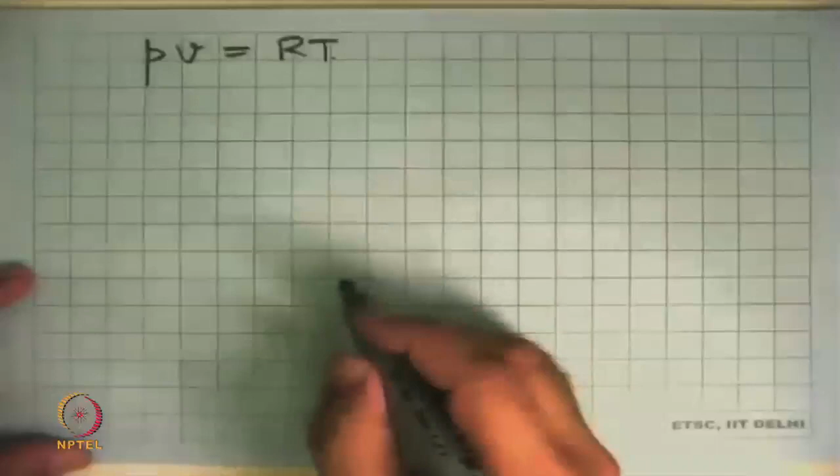We had looked at the properties of vapors, and we said that the equation of state, which we are so familiar with, PV equal to RT, doesn't apply to the vapor states, and this applies only to an ideal gas. This is the simplest form of the equation of state. We call it EOS, where P is equal to RT upon V. So basically, we have expressed pressure as a function of specific volume and temperature, or rho and temperature.

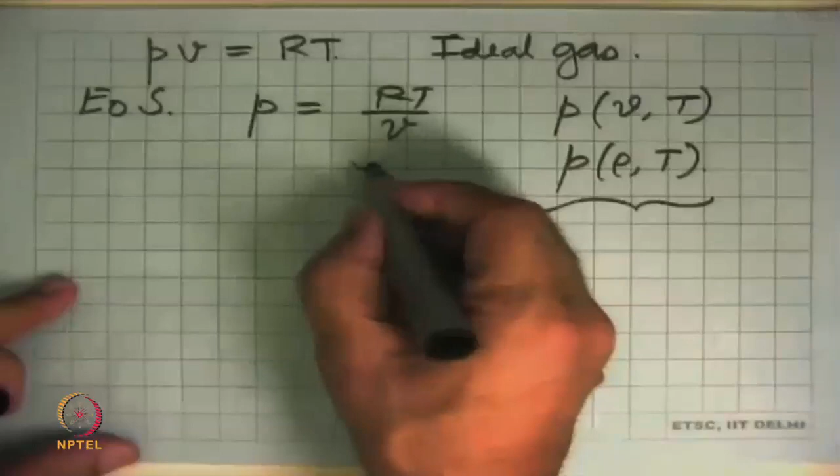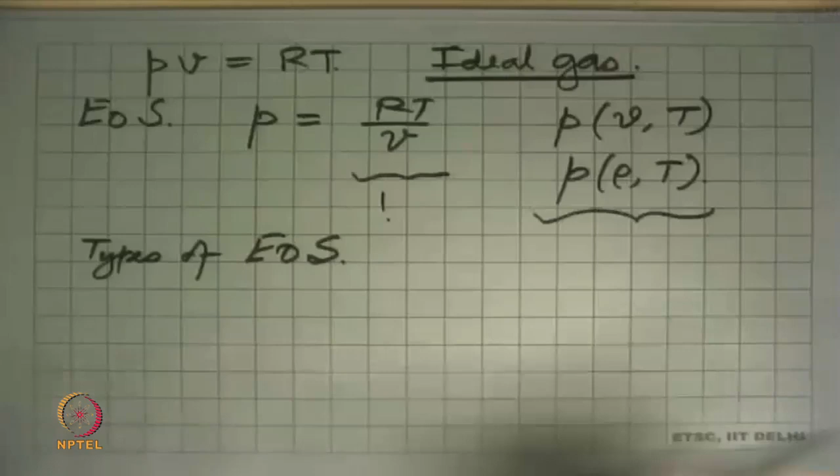So last time what we had seen is that we had defined the reduced temperature TR, T upon T critical, and we defined reduced pressure as the pressure upon the critical pressure.

The reason we did that is that it gave us a uniform set of parameters that are independent of the material, and so in some way these reduced properties are some sort of what we call normalized on a known constant. We can then talk in terms of different materials having the same reduced temperatures behaving in a similar way.

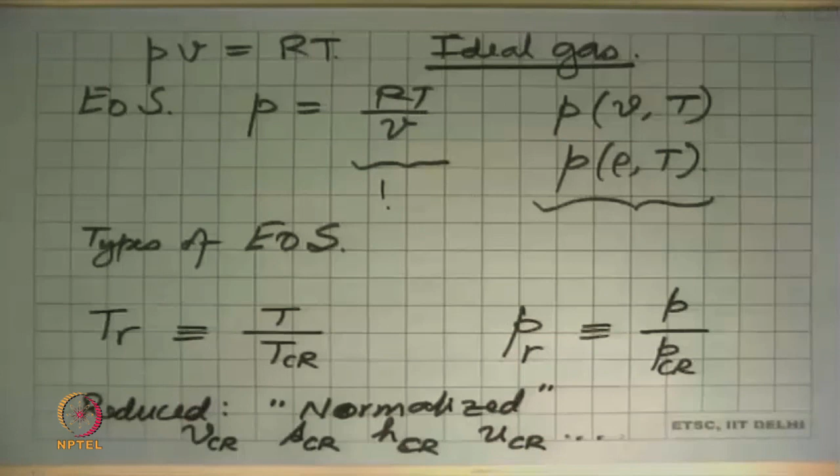So we defined these two, and it turns out that the critical states are properties of the substance, and along with that we have other critical states like the critical specific volume, the specific entropy, the specific enthalpy, specific internal energy, and so on. For a given substance, all these are unique, and you can just look up any tables and pick up all these numbers from there.

So this is what we defined, and then we went about doing an exercise of saying that if we plot on this side the reduced pressure and on the y-axis we plot the compressibility factor, then what will the graphs look like? For that we defined yesterday the compressibility factor Z.

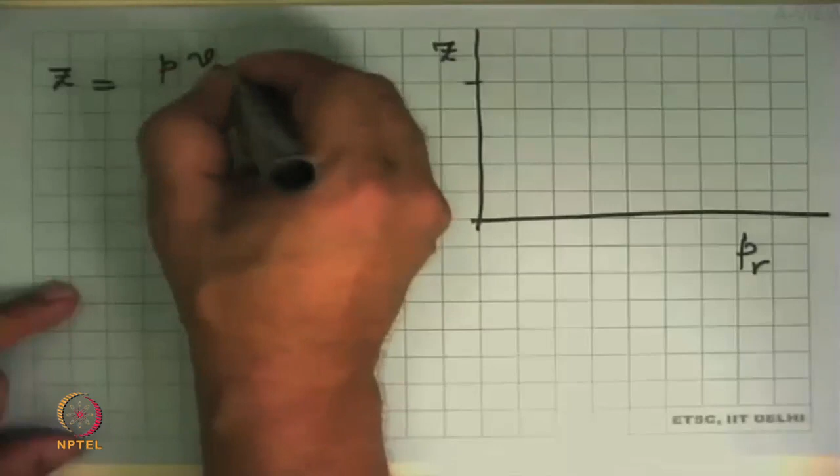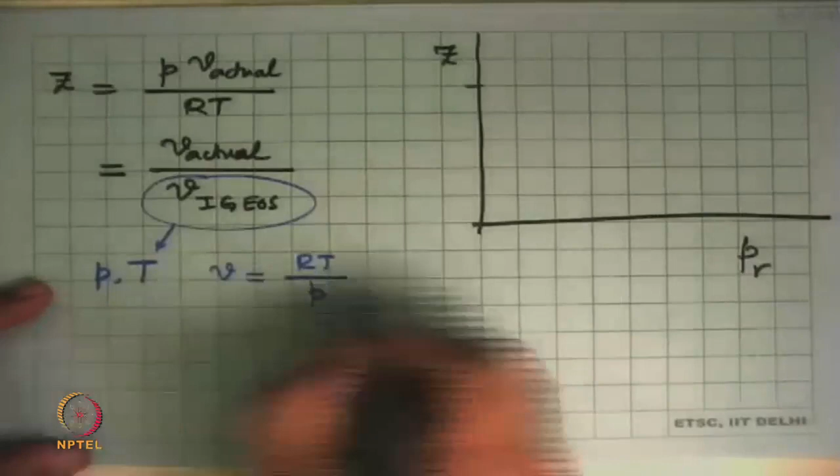Z is PV actual divided by RT, or the ratio of the actual specific volume of the material divided by the specific volume that would be calculated from the ideal gas equation of state. What we are saying is that for the ideal gas equation of state, if you have any pressure, any temperature for a material, nothing stops us from calculating V as RT upon P.

But the question is, this is from the ideal gas assumption, and how good is this assumption? That is what this ratio tells us: something we measure in the laboratory divided by what the ideal gas equation of state tells us, and we get the compressibility factor Z.

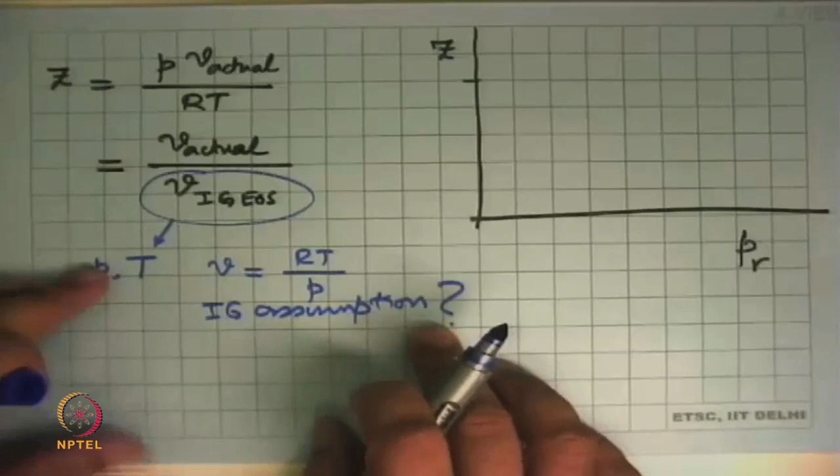And we went about drawing this curve, saying that ideally Z is equal to 1, and this is 1.0, this is 0, and this is a logarithmic scale going from 0.01 reduced pressure to 0.1, 1, 10, and even further to 100.

We argued yesterday that at very low pressures, when we start plotting, we ask: at a certain reduced temperature, what is Z? At this reduced pressure and the same reduced temperature, what do I get? At this point and the same reduced temperature, we get this. So if we go about doing plots, we'll get a series of points.

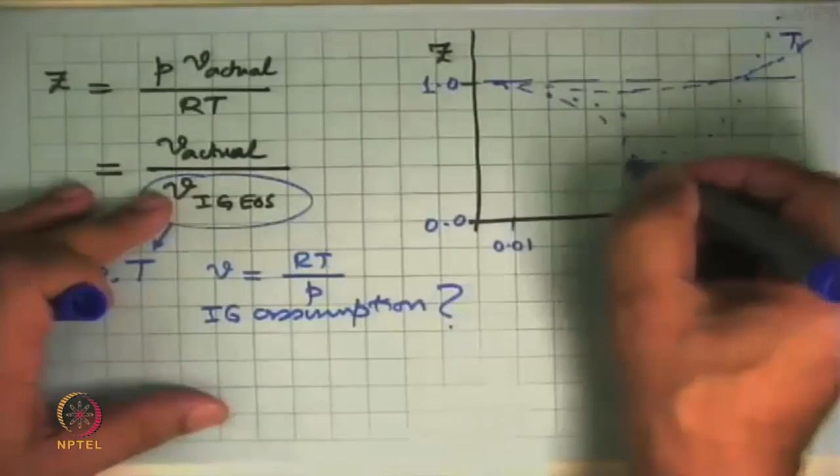They start looking something like this, at some particular value of reduced temperature. At some other value of reduced temperature, it begins to look like that. In some cases, it goes like that and then goes up. So around here, not at 1 but something like more than 10, we see that Z becomes much greater than 1, whereas on this side, Z is less than 1.

That means as pressures remain low and temperatures keep increasing, the strength of Z, which is the divergence from ideal gas behavior, increases. And Z more than 1 means that V actual is greater than V ideal gas.

This is when Z is greater than 1. If Z is less than 1, it means V actual is less than V ideal gas.

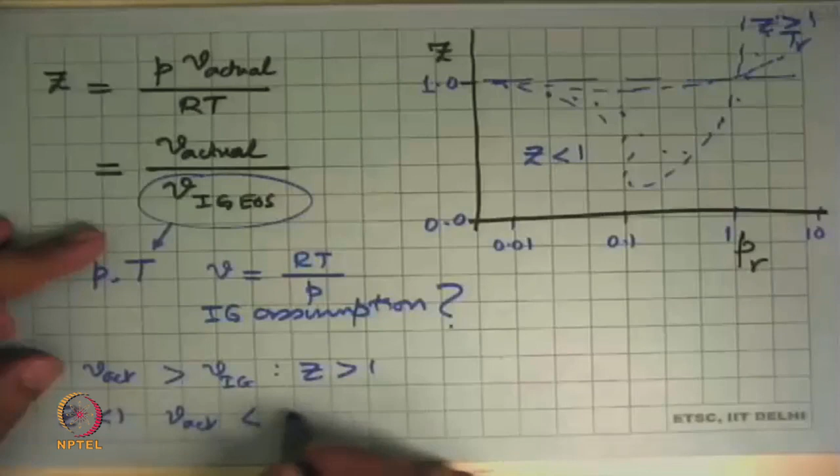That means the density would be the opposite. Here density is less than the ideal gas prediction, and here it is opposite. So in one case, the molecules are closer than what ideal gas predicts; in the other case, they are further apart than what the ideal gas equation predicts. That's what these two are telling us.

This complicates life quite a bit, because the nice equation of state that we had, PV equal to RT, now has to be modified as P equals Z times RT upon V.

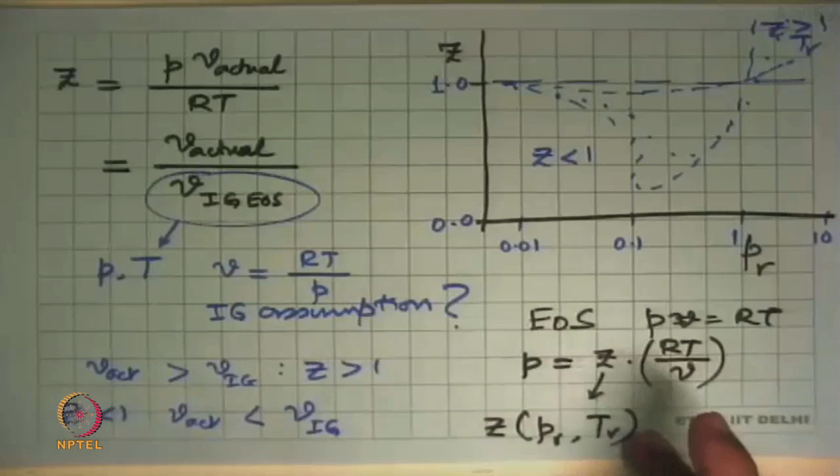And Z, as you can see here, is a function of reduced pressure and reduced temperature. Or for a substance, it is a function of pressure and temperature. If you take reduced pressure and reduced temperature, you get a common graph, which I will show you in a minute. So how do we get this?

And that equation for Z, again, one has to do curve fitting, and it comes out with a big long equation. Okay, so before that, let's look at how this curve actually looks like.

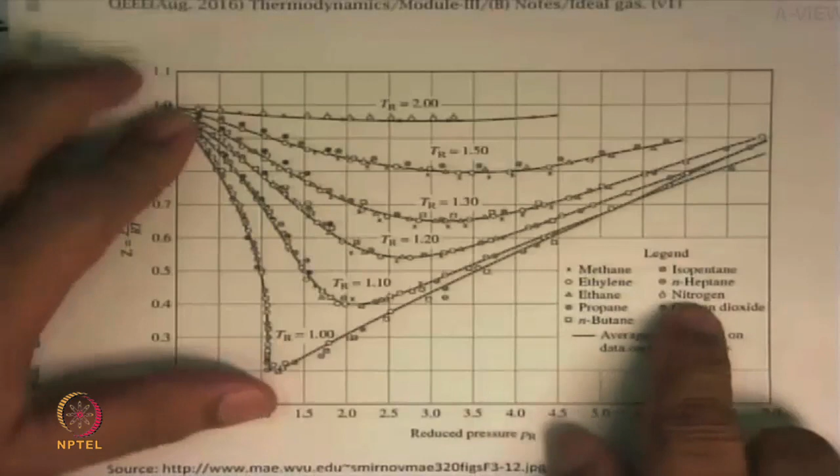So this is the real graph with real data from substances. In the legend, it shows data for methane, ethylene, ethane, propane, butane, isopentane, N-heptane, nitrogen, carbon dioxide, and water. We took the real data, measurements, calculated Z, and plotted these.

Let's take the first curve at the top here, and you can see there are some points there - circles, triangles, crosses - and they all fall within a relatively narrow band through which a curve fit has been done.

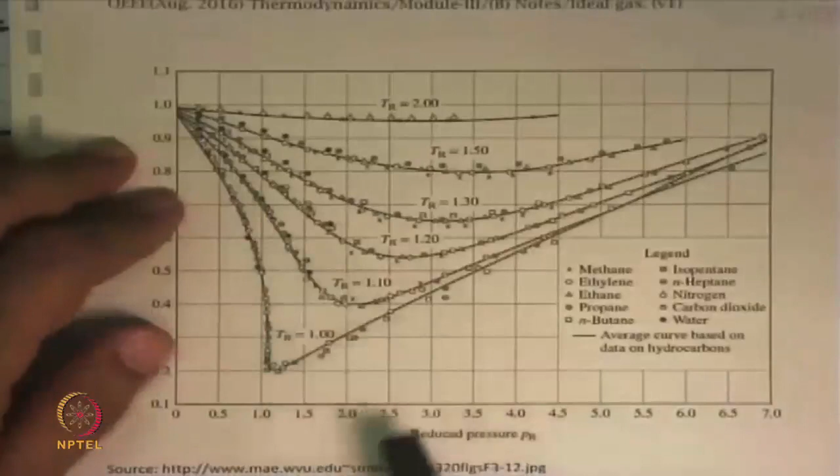The same thing was done with reduced temperature of 1.3, and we get this sort of a fit. And at reduced temperature of 1, that means temperature equals critical temperature, we get all these points here, and then they go off. They all fall on one line.

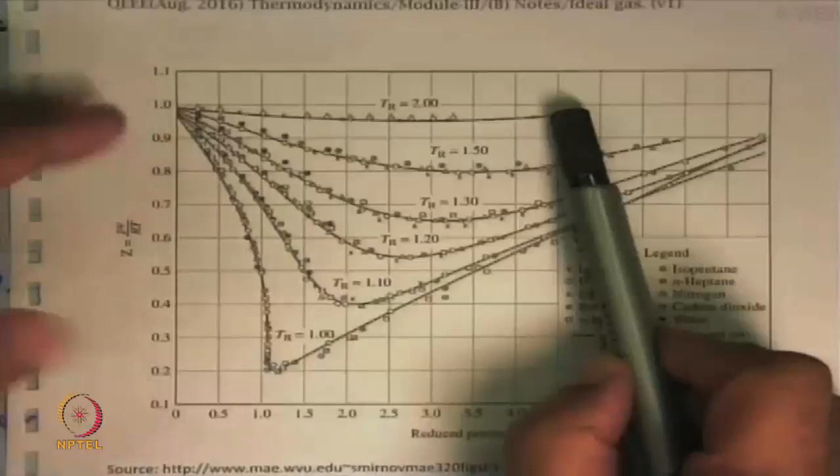This axis for reduced pressure is a linear axis, and Z is also a linear axis. The maximum here is reduced temperature of 2, meaning twice the critical temperature. So this is the reason why the generalized compressibility chart, as it's known, is so nice.

Irrespective of what materials we were looking at, and there are so many here, all their properties can be described by one family of equations, based on reduced pressure and reduced temperature. So that's what we have here.

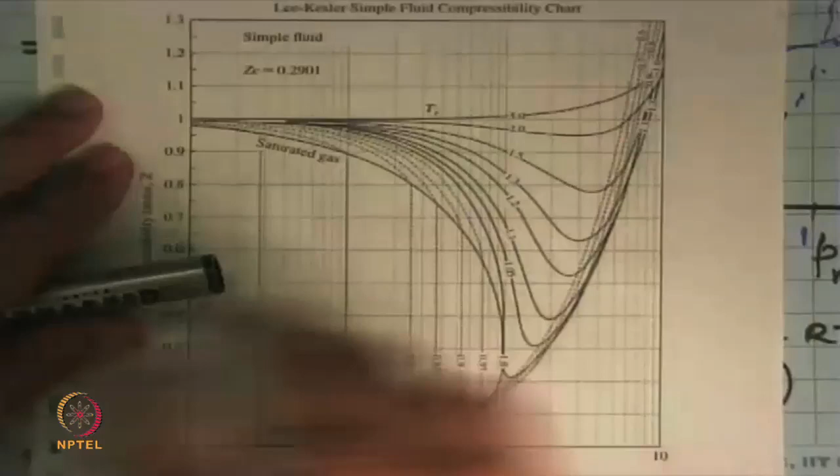The same picture on another scale. This is the same data, but now a curve fit was done to that data, and the model is called the Lee-Kesler simple fluid compressibility chart. So there's a Lee-Kesler equation of state, which was based on the data fit.

Once we have an equation, we can put as many points as we want and generate nice continuous curves, as you see on this picture. The x-axis is reduced pressure on a logarithmic scale: 0.01, 0.1, 1, 10. On the y-axis is the compressibility factor from 0 to 1, actually going up to 1.3.

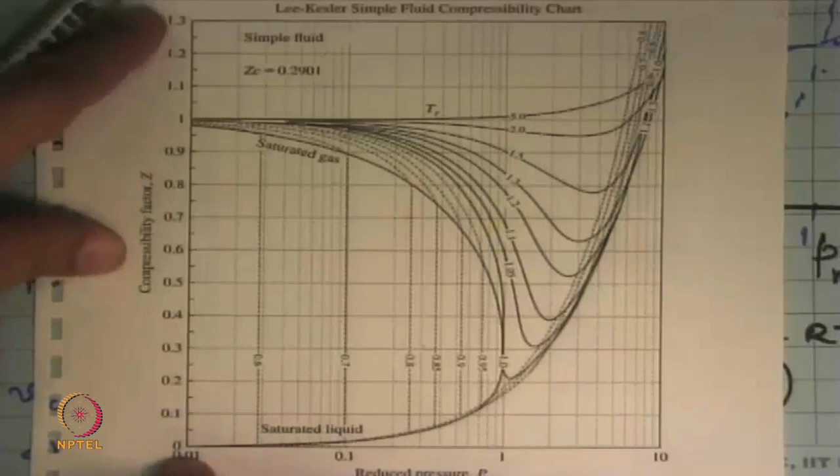And for all substances, the critical value of the compressibility factor turns out to be 0.29. Here are the curves. The topmost curve, very close to here, is the line Z equal to 1.

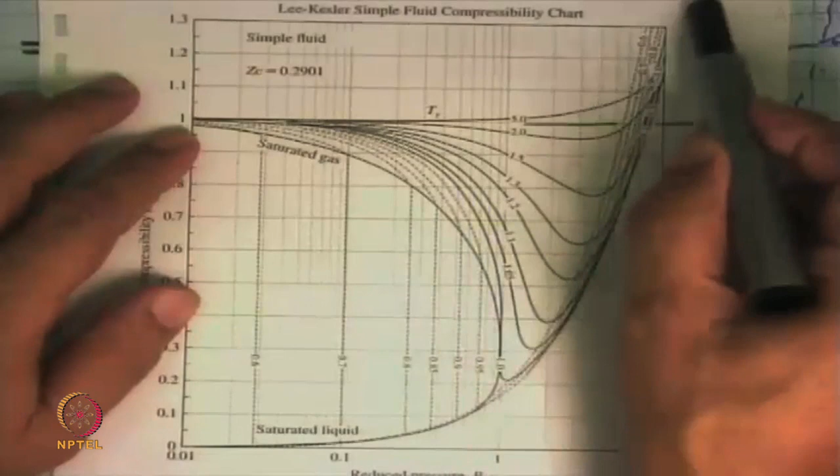So if we are close to this line, ideal gas behavior is pretty much good. Let's look at this first line here, reduced temperature is 5. What we see is this line goes up there, and it stays very close to 1 almost all the way through, then slightly rises. After this, the diagram isn't given, but they all rise very sharply after this.

So at reduced temperature of 5, that means 5 times greater than the critical temperature. At reduced pressure up to 1, meaning you're pretty close to the critical pressure, the compressibility factor is very close to unity. And that's quite a nice thing to know.

But what if you are not at that high a temperature? Here you see reduced temperature equal to 2, and the line comes like this. Now it is pretty much close to 1 up to this point, which is reduced pressure 0.1. After that it decreases, reaches the minimum, and then goes up again.

And then there is a big change between reduced temperature 2 and 1. This is 1.05, 1.1, 1.2, 1.3, and 1.5. At reduced temperature 1.5, all the curves start here, but it goes down there and then rises up again. So the deviation here is about Z equals 0.8 - you are 20% off from what the ideal gas equation tells us, and for most calculations that is not acceptable. We want to be within maybe 1-2% of the true value.

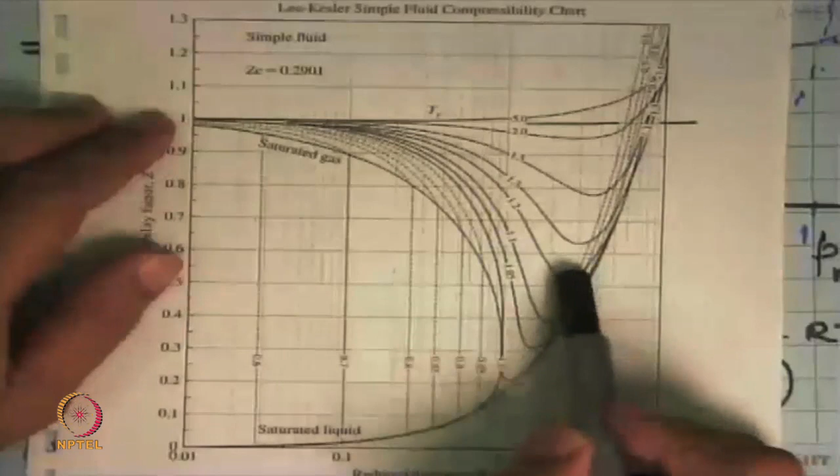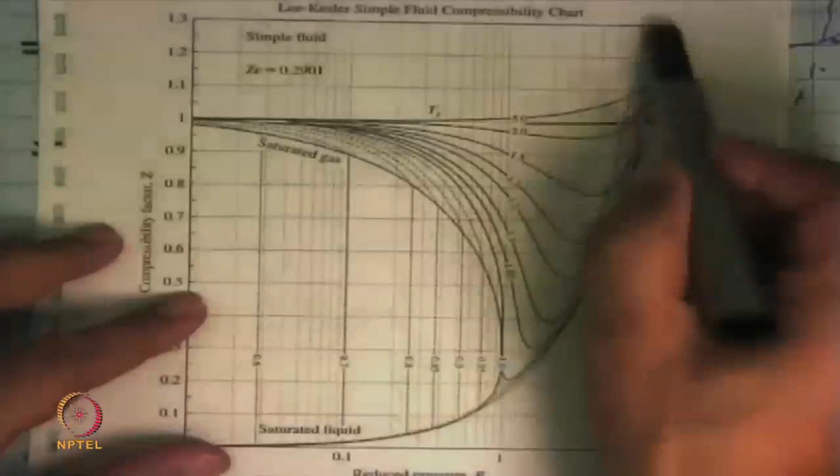So if you look at this part, they all start converging towards 1. If you go to even lower reduced pressures, all these curves will come very close to 1. That tells us that as long as you have a vapor, if reduced pressures are less than 0.1, then at any reduced temperature, the substance will behave like an ideal gas. That's one nice criteria to have.

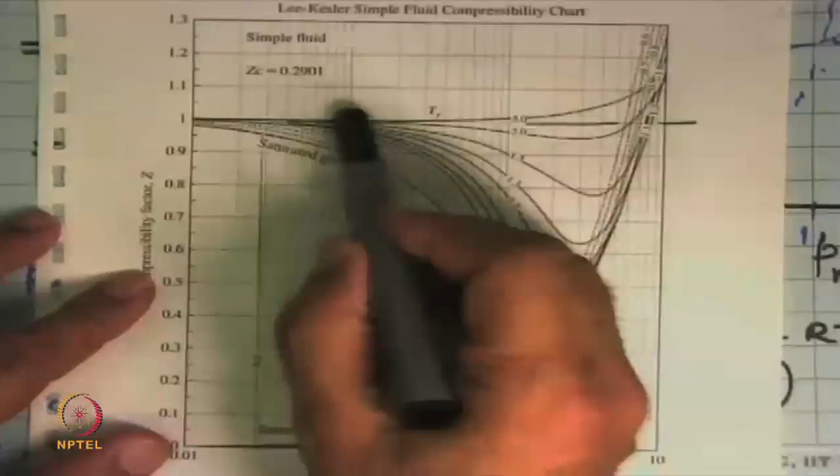The second criteria is that if TR is relatively high, between 2 and 5, then even at reduced pressures up to almost 1 or maybe 2, we can say there is ideal gas behavior at these temperatures. So two things emerge: reduced pressure less than 0.1, and definitely less than 0.01, at any reduced temperature, the vapor phase will behave like an ideal gas.

The liquid phase will of course not be anywhere like an ideal gas. What you're seeing here below is the saturated liquid line. As I mentioned, at any pressure and temperature we can calculate the specific volume, but the real specific volume in the liquid is going to be several orders of magnitude different, so you see compressibility factors all below 0.1, 0.2, something like that.

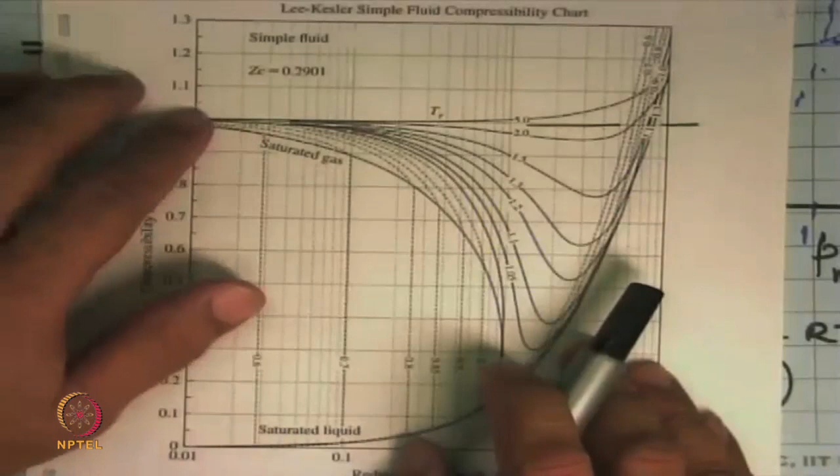And these are lines of constant reduced temperature - 0.7, 0.8, 0.85, 0.9 - not constant Z, this reduced temperature is constant. Because at this saturated state, at this reduced pressure and reduced temperature, many states are possible. The saturated liquid state has very poor behavior like an ideal gas - it's not an ideal gas at all. Whereas the saturated vapor state is getting close to ideal gas, but still about 0.95, so about 5% off. If we come further down in pressure, this difference goes down, and at such low pressures even the saturated vapor can be reasonably approximated as an ideal gas. So at very low pressures this would behave like an ideal gas, but not at higher pressures.

So this is what this picture tells us. And yesterday when we were looking at many of the property charts, let's go back and see what would happen to the TS diagram - temperature and specific entropy.

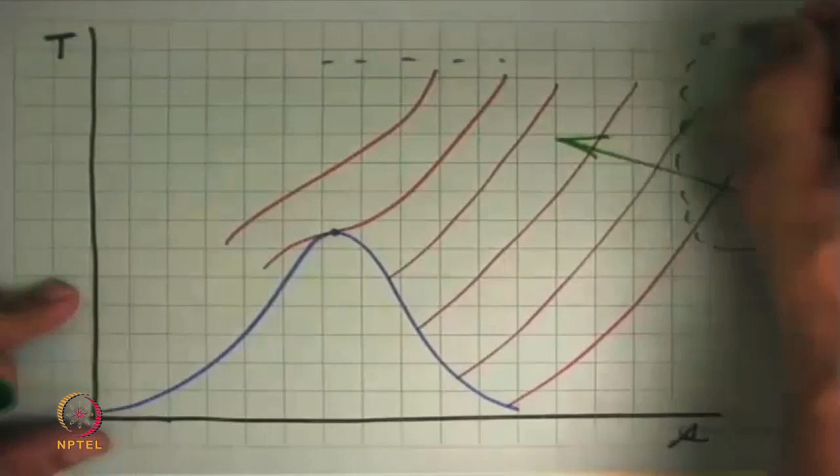So what the compressibility chart told us is that if you are far away from this region, reduced temperatures are very high, meaning you are much above that. And at low reduced pressures, remember this is increasing pressure, which could be 0.01 megapascal, 1 megapascal, 22 megapascal, 300, 400 megapascal. So at low reduced pressures and high temperatures, we are somewhere in this region, and that's where we say ideal gas behavior is good.

It also told us that even if pressures are very low, you could get down in this region and say that in some cases this would also be a reasonably okay type of ideal gas behavior. So this region, and far away from this, would qualify for classification as an ideal gas.

Now if I have to shrink this diagram and say where are we dealing with, say in the case of air, where we look at many processes like diesel engine, petrol engine, and so on. This is S, this is T, and for things like nitrogen and oxygen, the saturation dome would be somewhere over there, with this temperature being like 120 Kelvin, 150 Kelvin, something like that.

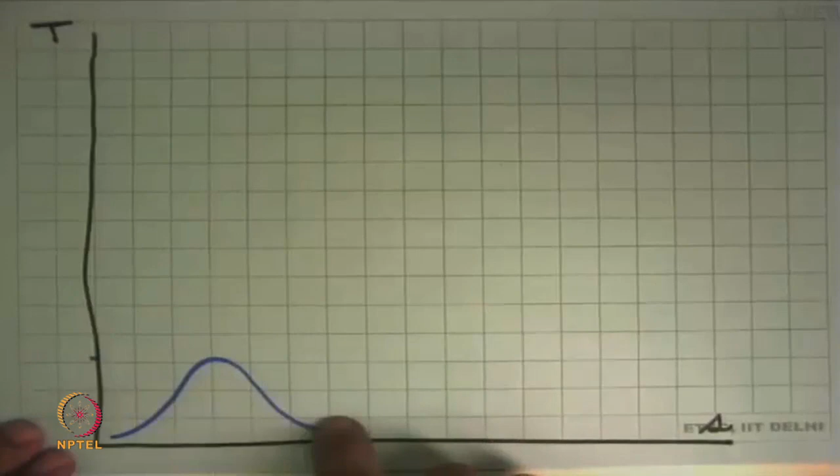Ambient temperature is 300 Kelvin, which is the air we have around us. Reduced temperature is 2 or of that order, like 2.2 or more, so we are quite high on that. And if you look at pressures here, they are low, so we are far away. If you look at the constant pressure line over there, these lines would go off there. Ambient air temperature would be somewhere there, so we are looking at this part.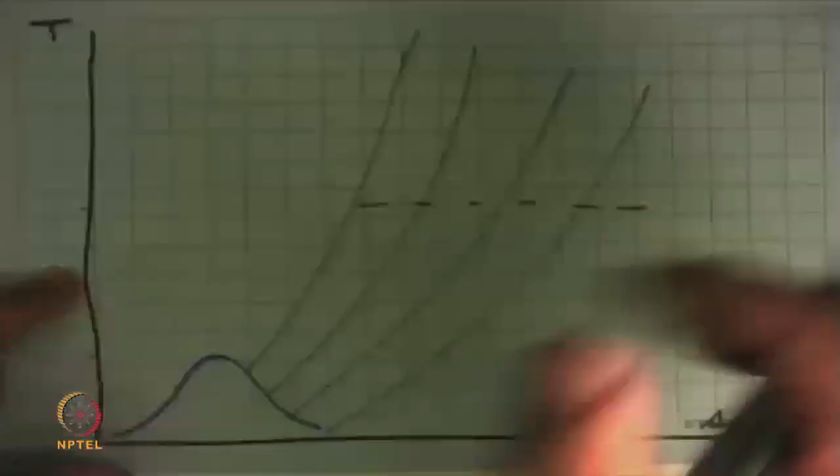And if you look at any process where we heat the air, like burning fuel in a boiler, or in a diesel engine, petrol engine, furnace, or compression, in all those cases temperatures would further rise. So from 300 Kelvin we might go up to as much as 1000 Kelvin, which would be a line somewhere over there. Ambient pressure would be say one, and maximum pressures we deal with in many applications would be something like that. So we are dealing with a region where many of our applications lie in this zone.

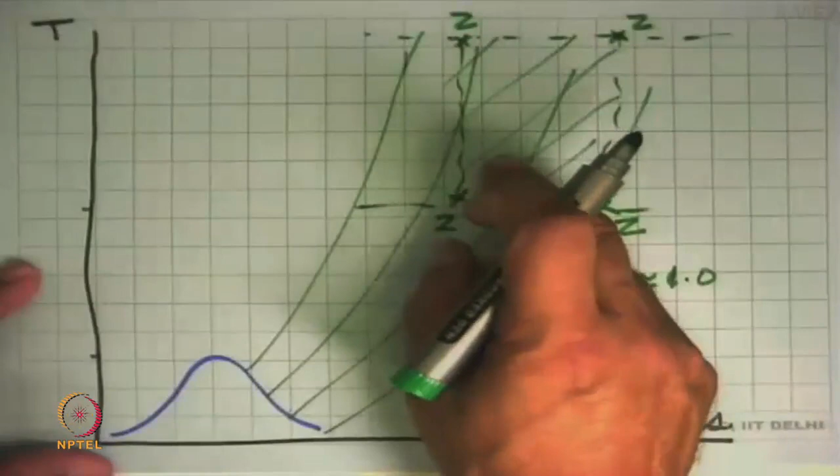And that's nice to know, that at the extremes of this, if we check the value of Z in each one of them, it turns out that Z is very close to 1, meaning any state inside this region can be assumed to be an ideal gas state. Any process that happens in this region, for example a constant pressure heating, or constant temperature process, or isentropic expansion like a turbine, gas turbine, aircraft engine, or a compressor working, would be something like this. So throughout this process, at any instant, Z is equal to 1, which means ideal gas behavior is fine throughout.

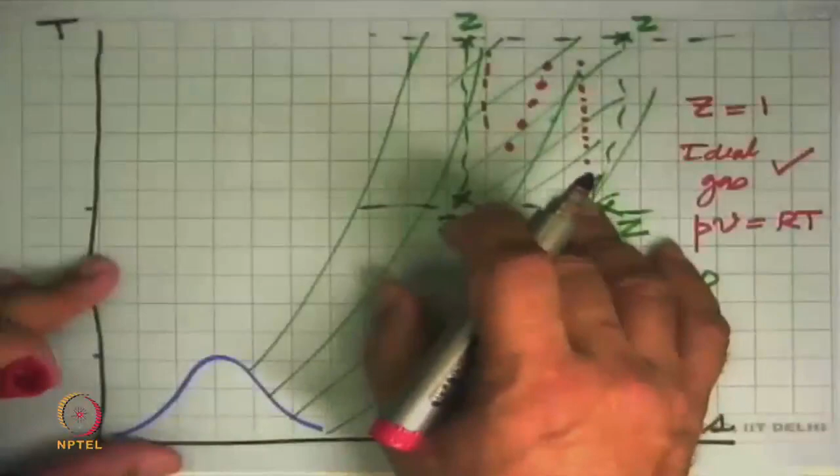And that means we can do complete analysis of this by just going back to PV equals RT. That's what we do in the first course on thermodynamics, when we look at analysis of cycles like these, we treat them as ideal gas cycles, use the equation of state PV equal to RT, and life becomes much easier, giving us a lot of insights into how these systems operate. At a more advanced level, when we go into detailed engineering, we'll relax this assumption and make it much more realistic. But the first cut analysis we are looking at is good enough to know what the cycle is and what the basic features are, because that is not going to change.

So what does this tell us? That if your cycle is in this region, this part is irrelevant. So whenever we look at a problem where the substance is always an ideal gas, and we plot these processes and states on a TS diagram, we will not show the saturation dome.

So in the diagram, if the dome is not there and we show a bunch of states like that, say there, or there, we are implicitly saying that this is an ideal gas state. So if the dome is not there, it implies this is a problem involving ideal gases.

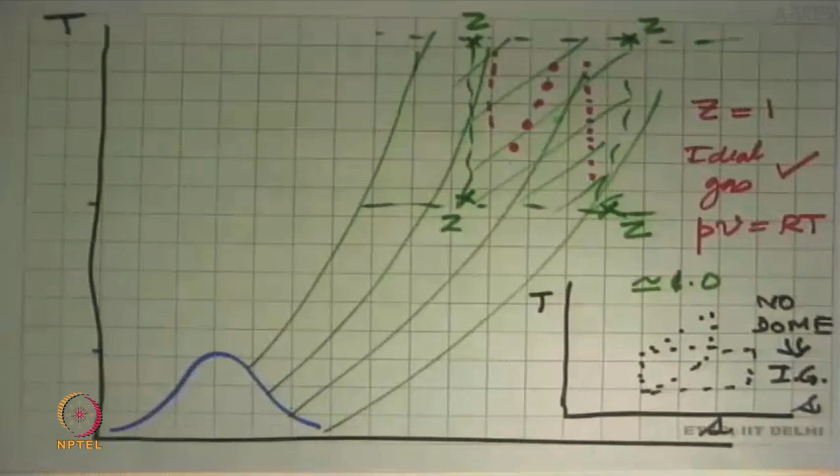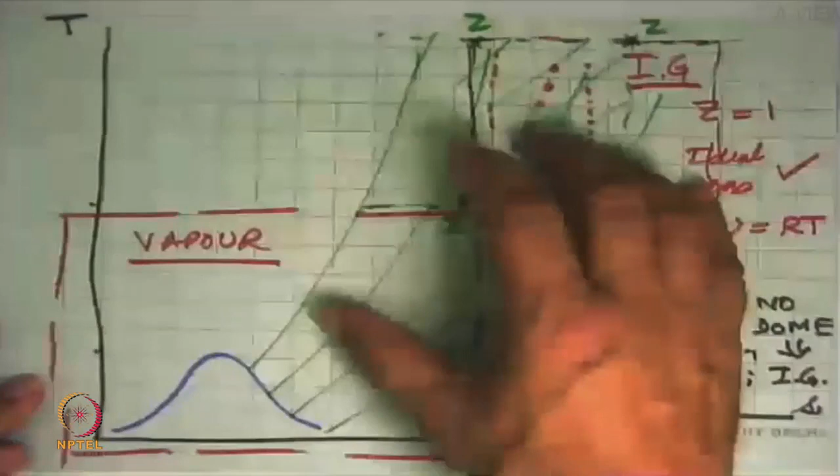And if you have a problem where we don't have ideal gas behavior and we want to depict those processes, we must work with this part of the chart, and we have to show the dome as a necessity. So this is a vapor cycle or vapor process, and far away here is the ideal gas. In this course, fortunately for us, these two regions are quite different from one another, so we don't have to worry too much about this. That does not mean there are no problems where we have both behaviors coming in at the same time.

Take, for instance, air, or say nitrogen, which is cooled to produce liquid nitrogen at constant pressure. So that cooling process will follow like this, go there and end up over there. It started at ambient conditions behaving as an ideal gas. At some point, it said, well, now you cannot use the ideal gas equation of state, but I still want to know what is the energy transfer in the process.

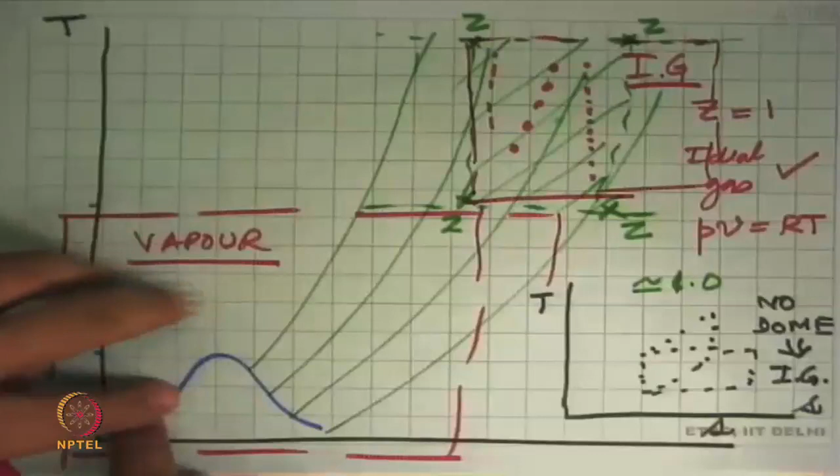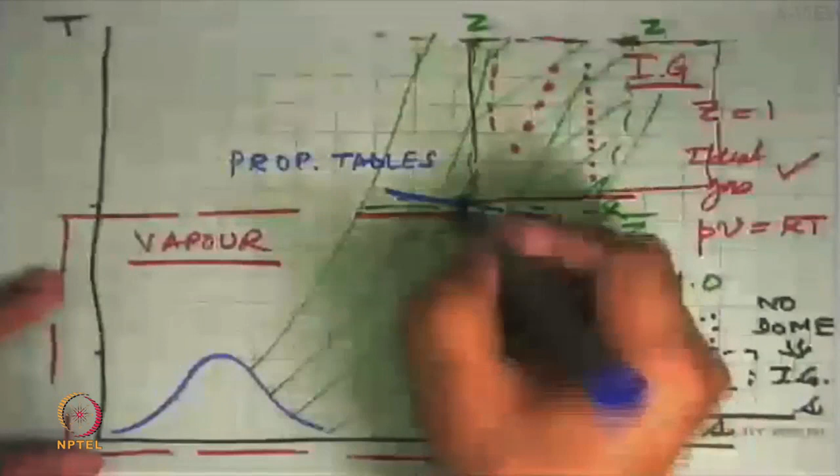It means that in this type of problem, we say okay, here there is a line, and that line we decide based on what data we have in the property tables. This line will be decided by the upper limits of the property tables. We calculate changes in properties, say from here to there or there or there, using the tables data. We calculate change in properties from here to there based on ideal gas equation of state, and the total change in the process will be the sum of change in both these.

So that's how we will have to handle problems where we know that somewhere I have ideal gas, somewhere I have a vapor-like behavior or a non-ideal gas behavior, then we must make this distinction. Just assuming ideal gas all the way through is going to be quite a mistake. Okay, so this is the part of this, and now we ask the question.

In the vapor table, the moment I know the state, from the tables we could get all the other properties. So if we needed to compare S1, S2, or we needed change in specific enthalpy or internal energy or any other property, as long as we had two independent properties at the state, we could go to the tables and pick up all the other properties and do any calculations we want. So that's how we use the tables and charts.

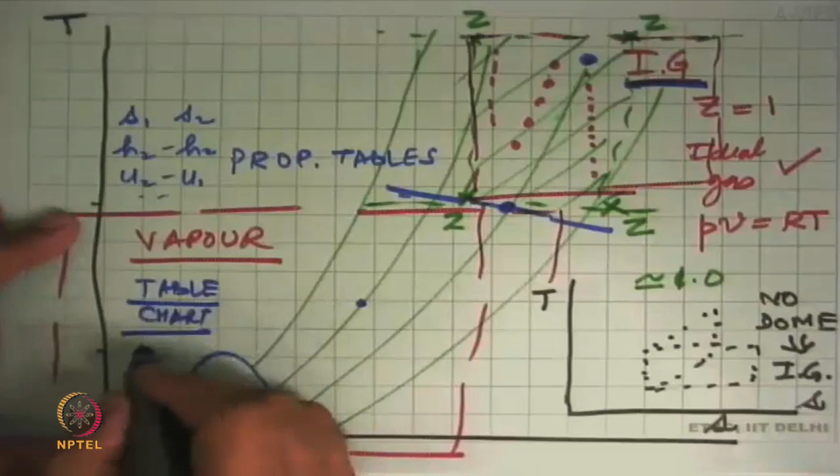Or these days, use a software that is there. And if you don't have software, you can go online and there are many free things where you just put in properties and you will get all the other properties out. So that is what you do here.

Here we have two options. One is, of course, we use the ideal gas equation of state. That means there are no tables and no charts, which is okay, doesn't matter. The second is there are some tables, but these are largely for a pressure of 0.1 megapascal.

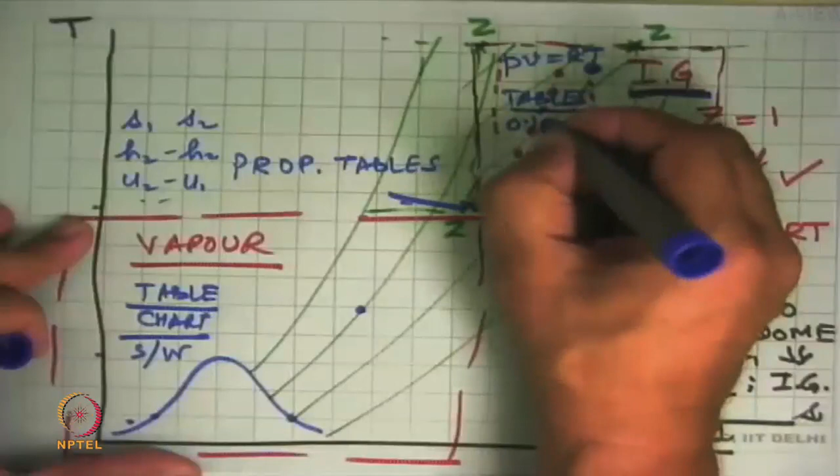So you can say that air or nitrogen or oxygen at 0.1 megapascal, I want to know the enthalpy change from 100 degrees Celsius to 200 degrees Celsius. One can look up this table and get that data. But that is for 0.1 megapascal. For higher pressures, these tables are of no use. At very low pressures also, we can get some idea from this data, but that's not the best thing. So tables are of limited use, and there are very few tables as far as ideal gas properties go.

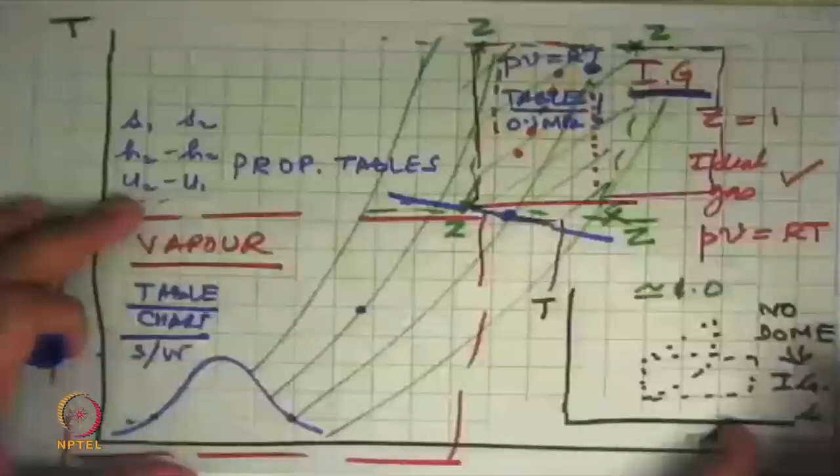The best option we have in both cases is that we take the full equation of state, which is a relation between P, V, T, and solve it. That's a much more complicated process. Unless you have to do it, you won't do it. Otherwise, we let others do it and we use that formulation for solving our problems.

This is what we will do in the tables and charts anyway. That's how these things came about, and so did the software. Here also, we can make tables, but there is no real point because in many cases, this is good enough.

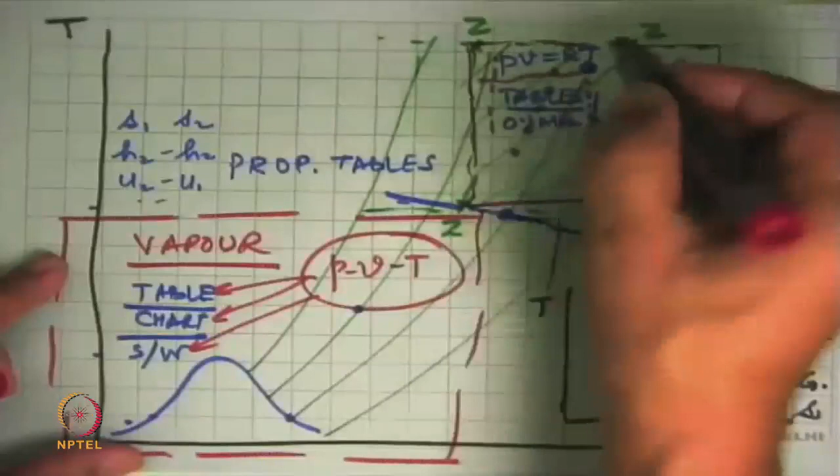So now what we will do is, we say, look, how do I calculate property changes for ideal gases? We'll concentrate first on change in specific enthalpy, change in specific internal energy, then we look at change in specific entropy, and then we will look at some other things.

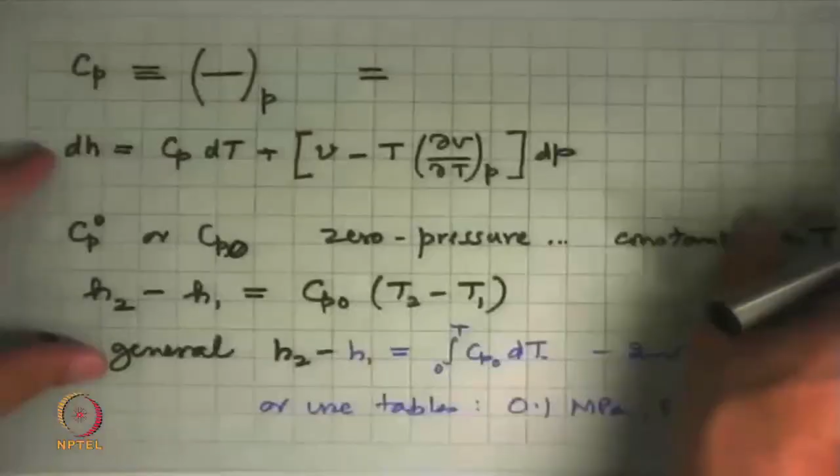Okay, so the next thing we have to do, we define two properties. The first is constant pressure specific heat. We denote this by Cp, and it's defined as dH by dt at constant pressure. Okay, so that's what we have.

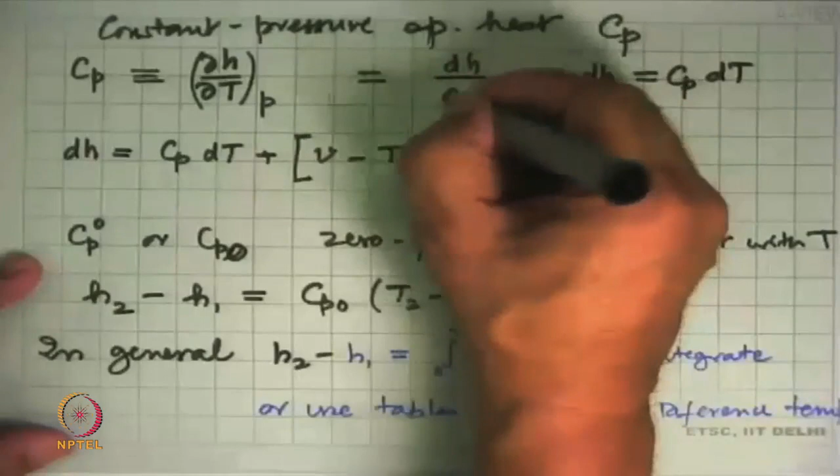And we can also write this if we want as dH is equal to Cp dt for a constant pressure process. So if H is only a function of temperature, then we can write this as an exact differential, and that's how we get this.

The difficulty is that in the real world, this Cp is a very strong function of temperature. And I'll show that data for some substances.

So we have two options. Either we assume that this is constant. And in this course, we will assume that. But we should remember that that's only an assumption, and the real thing would be that we integrate Cp with T from state 1 to state 2, whatever the temperatures were.

So if you were to do this part and write the full equation, then this is what we will get: dH equal to Cp dt plus a whole bunch of things here. You don't need to worry about it, but I'm showing you how there's a dependence on temperature, how there's a dependence on pressure. The point to note here is that in the square bracket, we have derivative of specific volume with respect to temperature at constant pressure. So this entire thing is something that can be evaluated from the PVT relationship or the equation of state. And from there, you can do some differentials on it, put it in there, and we can calculate dH from this.

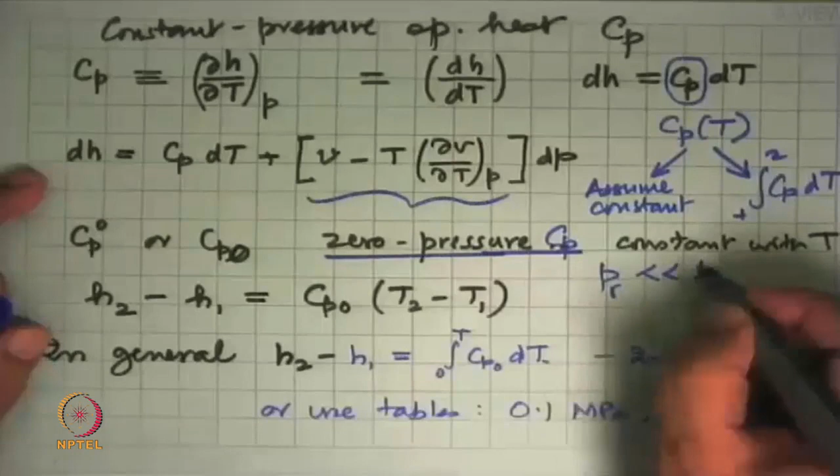So what we do is, we will say that if we define another sub-category within Cp, which is zero pressure specific heat at constant pressure. Zero pressure means that the reduced pressure is very much less than 1, say 0.1. At that low pressure, it is reasonable to assume that it is constant with temperature, and to denote that it is different from Cp, which is in reality a function of temperature, we use a new symbol which is Cp0. Some books write this as Cp0 over there. Both have the same meaning.

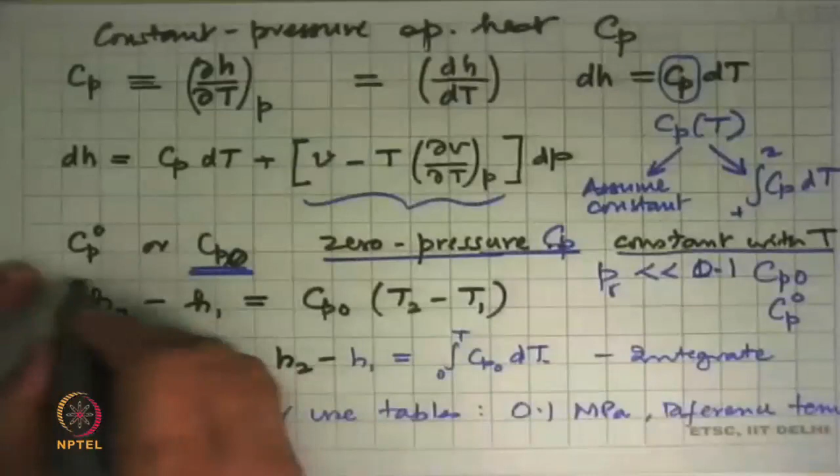So we put that and integrate it, and the relation that we will use in this course is H2 minus H1 equals Cp0 times T2 minus T1. A very nice and simple equation that is directly related to the temperatures that we are looking at.

So that tells us how to evaluate specific enthalpy change between two temperatures. So here, if we needed to know specific enthalpy change from here to here, we just needed the two temperatures, and enthalpy change will be Cp times T2 minus T1. And if it was up to the limit to where the tables were, then we could get this number from that equation and the remaining enthalpy change from the tables and add them. The differences are independent of the reference state from which property measurements were beginning. So we are okay with that.

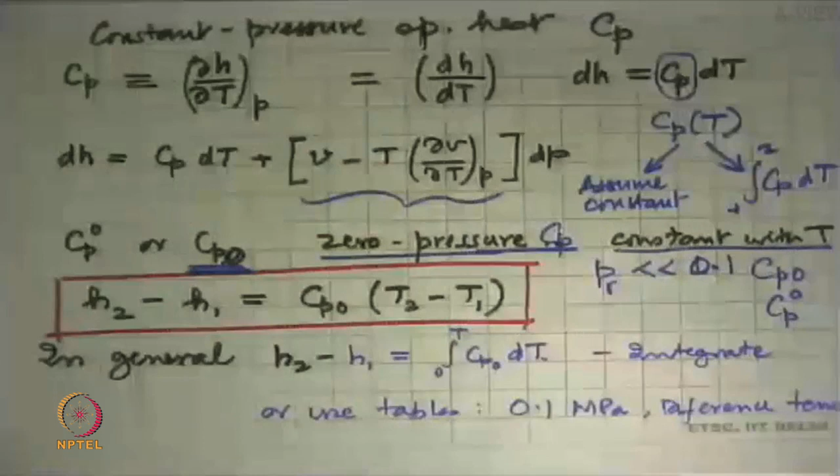So that's one new thing that has come up, the constant pressure specific heat Cp. We'll now look at its counterpart, which is the constant volume specific heat, Cv. Cv is defined as dU by dt at constant volume.

And if we work out the full relation using dU equal to all the expressions that we have, we will get this type of dependence. So basically, we are saying that this is a function of only T and V. So we get an equation on this side, this big bracket term, which is like earlier, a function of pressure and temperature only. So an equation of state will enable us to calculate this whole thing.

And if we have to get the exact internal energy change, we integrate this whole equation in some sort of an equation like this, and then get the answer, knowing well that Cv0, like Cp0, is a function of T. So Cv also is a strong function of temperature.

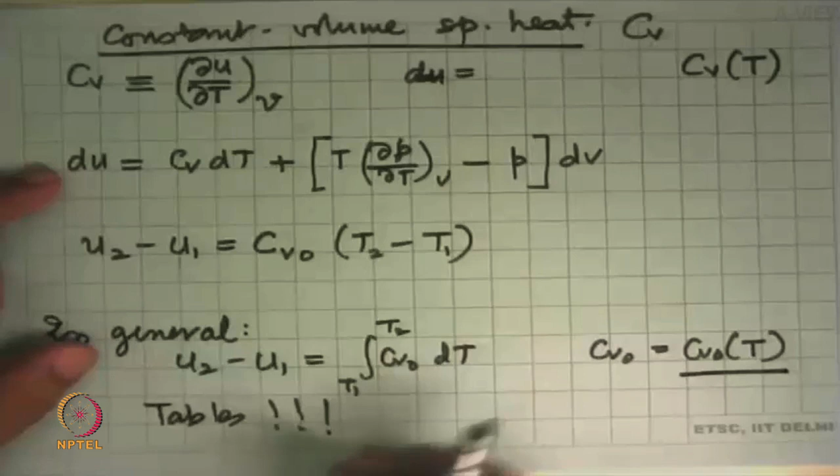That is long and tedious, we won't do that. We will do what we did before with specific enthalpy, and say that Cv0 is dU by dt, and du by dt, and when you take it to the other side and integrate, we get the next equation we can use in our analysis: u2 minus u1 equals Cv0 times T2 minus T1. That's a nice compact equation to use for solving problems.

So we got two new properties that came out, the specific Cp and Cv, and a sub-classification which is Cp0, Cv0, which are zero pressure properties. And we got two equations for how to evaluate changes in those properties, and what it tells us is that it is only a function of temperature.

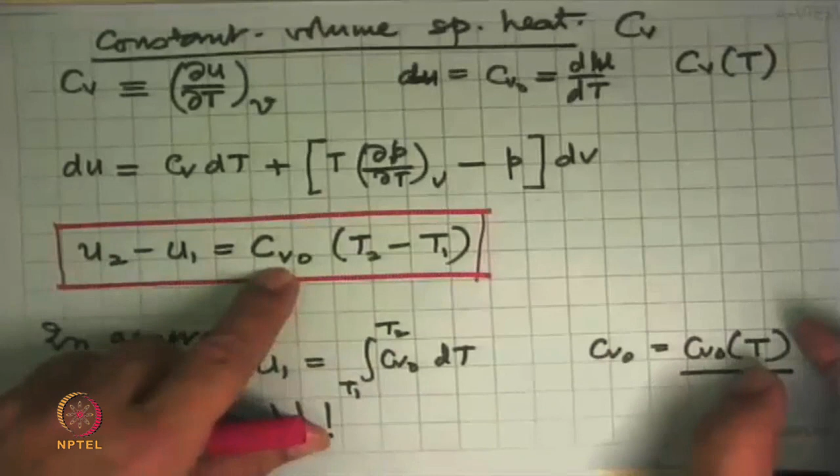The question is, how do I get Cv0 and Cp0? These are standard data that have been measured, and over a range of temperatures, these are given in various tables. So what is done there is that Cp0 for this material equals this much for a temperature range from this temperature to this temperature. And it will tell you that this is good enough within say plus minus 3% or 4%, and that's good enough for our purpose. We will follow this. Where 3% is not acceptable, we have to go for the full equation like this one.

So these are available in various books, charts, and even on the web. We can pick up, knowing the material, what the temperature is, and get the specific heat there and then use it in problem solving. So that's half the story done for the ideal gas changing specific enthalpy.

Now we ask, how do I calculate entropy change for an ideal gas? So this could be a process where there is, say, an irreversibility in a compressor, or there is heating of a gas taking place, and we want to know what is the entropy change. Enthalpy change we got, now we want to worry about entropy change.

So we have two options here. Entropy change can be obtained either from a combination of pressure and temperature, or specific volume and temperature. So we will get two equations, both are identical, and we can use either of them in our problem solving. First we will look at PT, then we will look at VT.

So what we get with this is that TdS, we start with the relation we already had. This is equal to dH minus VdP, one of the equations we derived, Gibbs equations, as we were talking earlier. And now we do some simplifications on this. They're saying that dH, we have already just seen the definition of specific heat at constant pressure, can be written as Cp0 dt.

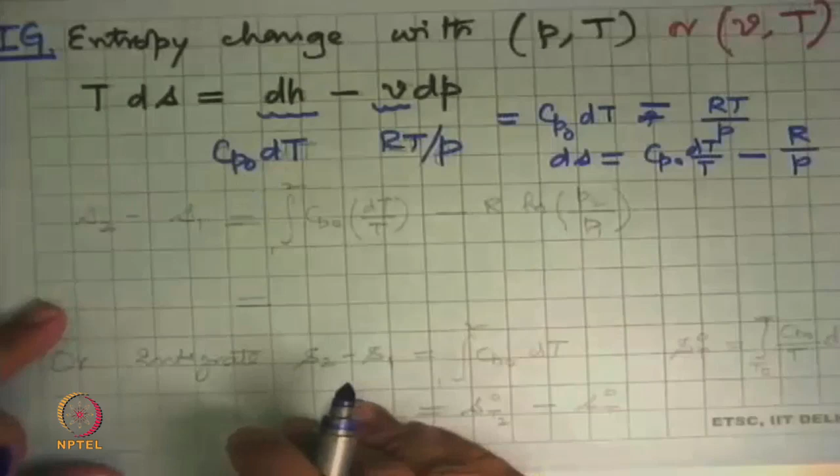And since it is an ideal gas, remember this is now only for an ideal gas, V can be written as RT upon P. And so this gives us an equation which is Cp0 dt minus RT upon P, and there is a T on the left side. If you take it to the other side, we get an equation which says ds equals Cp0 dt upon T minus R upon P, into dP.

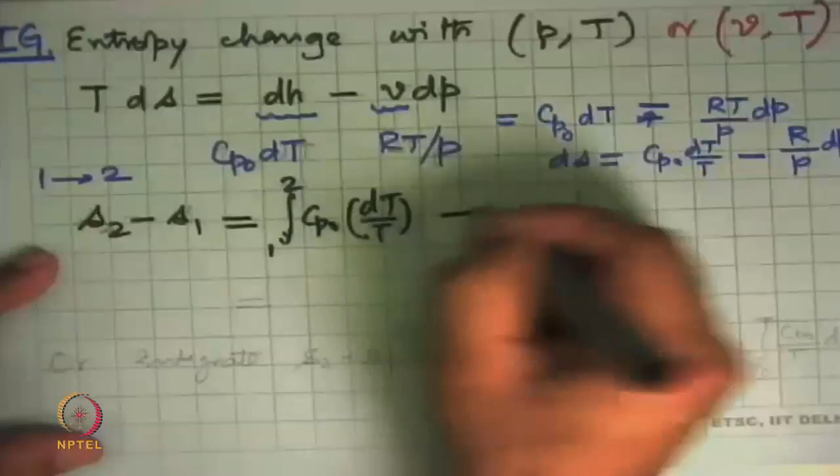And that can be integrated. To make life simple, we use Cp0, so this becomes independent of temperature. So when we integrate it, this comes out of the integral. And we do a simple thing from state 1 to state 2, and the answer is we can just look at it and know what it looks like: S2 minus S1 equals the integral of 1 to 2 of Cp0 dt upon T, minus R ln of P2 upon P1. This term, there is no problem, it is straightforward, R is constant, we take it out, and that's what we get.

And if Cp0 is constant, this final equation becomes Cp0 ln of T2 upon T1 minus R ln of P2 upon P1. And that is the equation that we have been looking for.

We have an option of using property data where a property called ST0 is listed in the tables, which is zero pressure standard state entropy, defined as the integral from T0 to T of Cp0 upon T dt. And S2 minus S1 will be ST2 at the zero state minus ST1 at the zero state, and we get the answer. This means you take the temperature, look up the table, get the value, then at the other temperature get that value, subtract the two, and you get S2 minus S1. But the caution is the same: this is for 0.1 megapascal and at low pressure.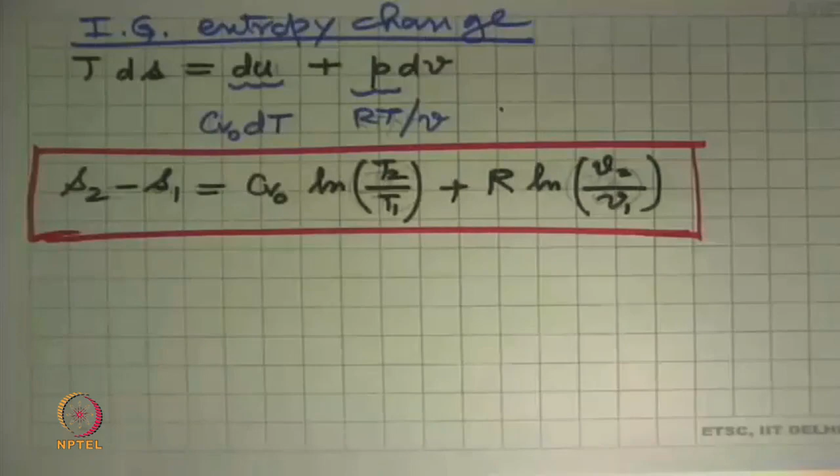Now I mentioned that Cp is a function of temperature. So let's spend a few minutes looking at this data, which is real data for substances. On the x-axis is temperature in Kelvin, starting from 0, 400, 800, 1200, 1400. On the y-axis, Cp in kilojoules per kg per Kelvin, starting from 0 and going up to 18.

And what you see on this curve is that there are a lot of curves over here, one slightly above that, and this one way above that. That means here is a material whose specific heat is like 14 kilojoules per kg per Kelvin. It can take in a lot of energy for its temperature to rise by 1 degree Celsius. And this substance is hydrogen - a very common substance that we can produce by electrolyzing water, and it has this wonderful property of very large specific heat.

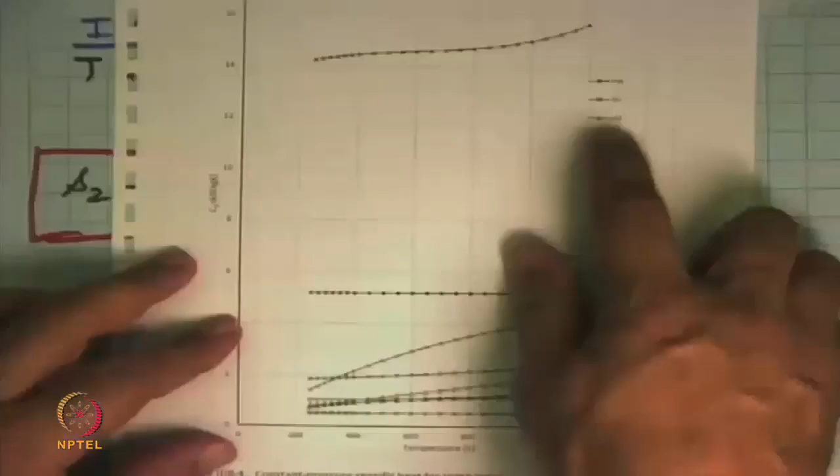So where does this come in use? If you want to cool something, you would like a substance which can absorb a lot of energy without its temperature rising too much. Otherwise the temperature differential between the coolant and the material will decrease, and the heat transfer rate will come down per Newton's law of cooling, which isn't very nice. Hydrogen has a tremendous specific heat, and that's why in large electric power generators in all power stations - whether nuclear, coal-fired, or oil-fired - the cooling of the generator, which is like cooling an electric motor generating heat because of I-squared-R losses, is done by hydrogen. So these big machines are filled with hydrogen to about 3 or 4 bar pressure, and that's the reason we use a chemical which, from a safety viewpoint, is somewhat dangerous, but has excellent thermal properties.

So this is way outlier - hydrogen is way out on this chart. Let's now move on and look at the next big chart that comes up way up here, and this is helium. So here is helium.

By looking at it, it looks like this line is almost straight, and that is the case. But as far as the value goes, it is 5 point something, which again is a very high specific heat. So helium has a nice high specific heat and is completely independent of temperature. That's what we see from this part. Now let's go down further - with the last line here, this also looks pretty much straight, and if you see what this is, it's argon.

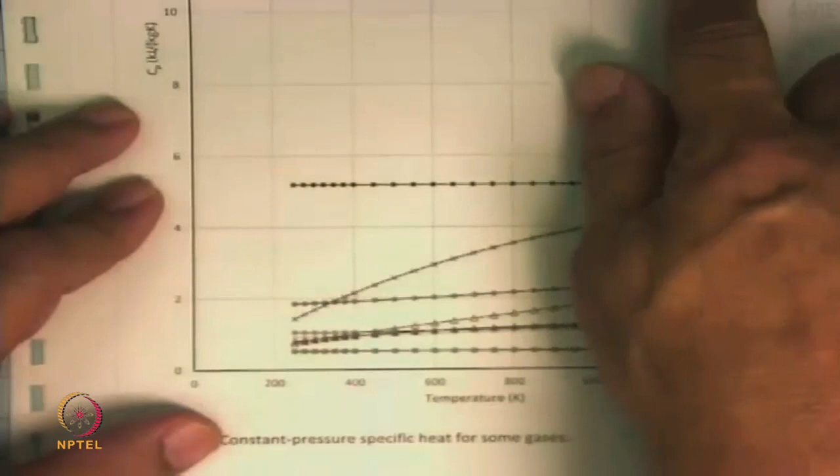So argon's specific heat doesn't change with temperature. Helium's specific heat doesn't change with temperature either. You can extend that and conclude that helium and argon are monoatomic gases. They have very few ways in which they can absorb energy in the atom, and so the specific heat doesn't change much with temperature.

So these are two monoatomic gases. The dependence on temperature is very weak.

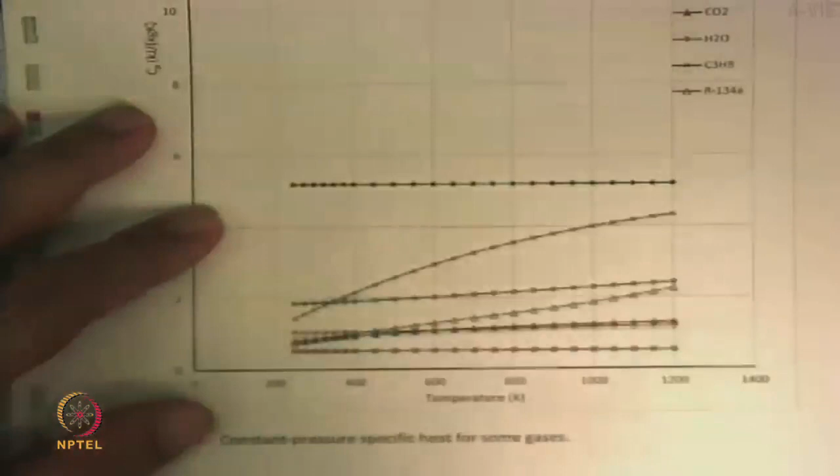Now let's look at all the other things lying in between here. We then have nitrogen there. You can see this nitrogen's specific heat increases slightly as you go up. There is oxygen, which is the cross, and you can see this is going up too. So what has happened now is that these are diatomic gases. They have vibrational modes of storing energy, and so their specific heat is now dependent on temperature much more strongly, whereas monoatomic gases had nothing.

Hydrogen was also a diatomic gas, so there is a slight increase we see there. So monoatomic gases' specific heat don't change much with temperature, while diatomic gases show a somewhat strong dependence.

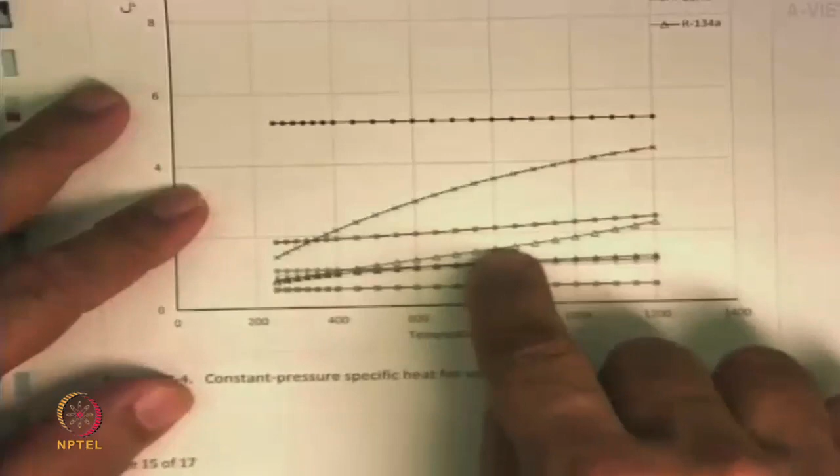And you go to bigger molecules, carbon dioxide and water, and then propane and R134A, which are bigger molecules, and you can see that they all have a dependence on temperature. But qualitatively, their specific heats, including that of water and even nitrogen and oxygen, are way below hydrogen and way below helium. So there's a huge difference there.

And this curve, you can see, is for water, going up, and we know that water in a liquid state has a specific heat of about 4.18 kilojoules per kg Kelvin. Water is one of the materials which has the highest specific heat amongst all known materials. That's another reason water is a good thing—firstly it is abundant, and second it is good for cooling. So water is about 4 kilojoules per kg Kelvin, a very good high specific heat.

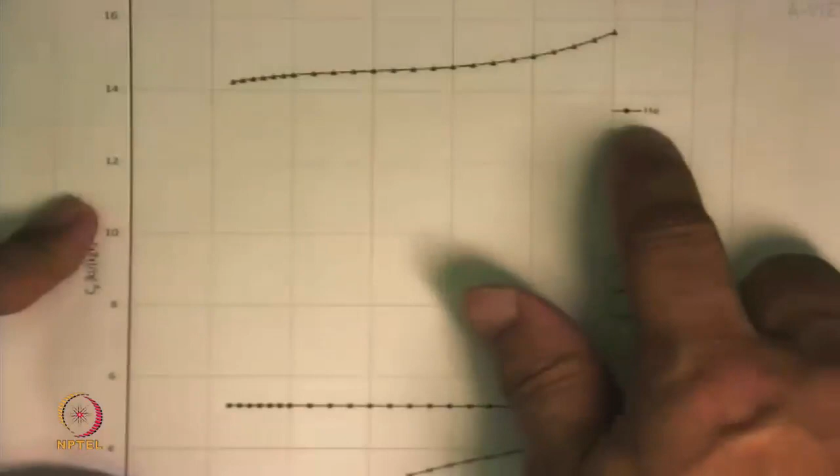Metals have much lower specific heats, but among other substances, helium and hydrogen have very, very high specific heats. This is good for engineers, whereas hydrogen is dangerous, so you have to be a little more cautious in designing your equipment. Helium is inert, and you can quite happily use it without worrying about corrosion or reactions. The trouble is, helium is a rare gas and very expensive—you can buy it, yes, but use it only if absolutely necessary.

So that's what we were looking at—integrating Cp with T. This is for the gaseous phase.

Now we look at something you learned in school days, but it now comes out in two minutes using the thermodynamics we've learned—the relation between the two specific heats. We have this relation, the definition of specific enthalpy: dH equals dU plus p dV.

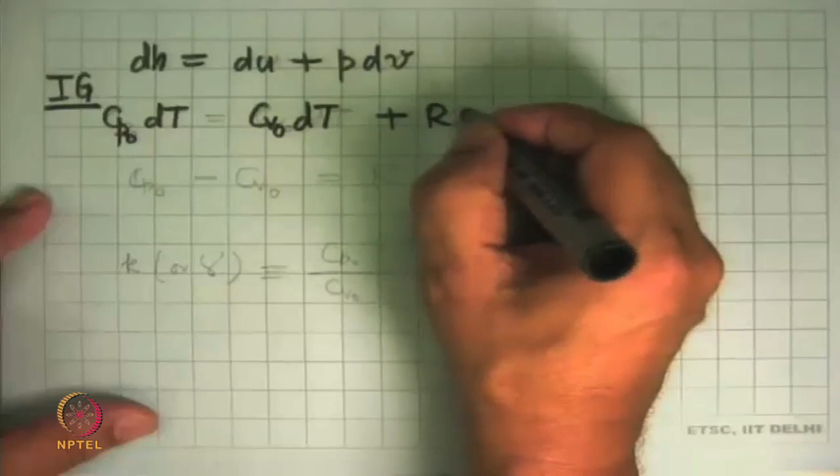This is true for everything, no issues. Now we ask, what about an ideal gas? We say dH becomes Cp0 dT, dU becomes Cv0 dT, and p dV becomes R dT. Removing dT from there, you get Cp0 minus Cv0 equals R—something we have known from school days.

Units of all three in SI units are kilojoules per kg per Kelvin. The second thing, a number we will exploit more and more for gases, is the ratio of Cp0 to Cv0, defined as K, or in some cases gamma, the specific heat ratio. If you remember your physics from other courses, for air it is about 1.4, for monoatomic gases it's about 1.67, and for bigger molecules it is smaller.

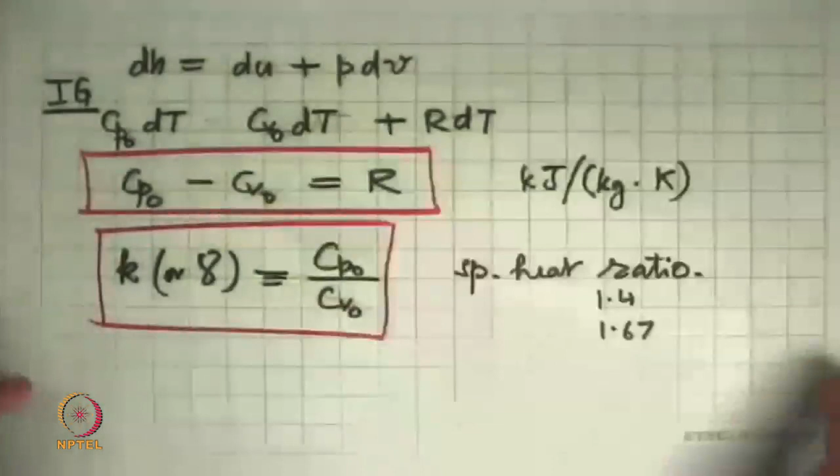So we have two more relations we can use: K defined as the specific heat ratio, and Cp minus Cv0 equals R. This came about in a very nice way—from the first law of thermodynamics we defined this, the ideal gas approximation gave us this, and then this. This first relation is always true, but this second one is an approximate assumption we made, so it is only true for ideal gases and no other substance.